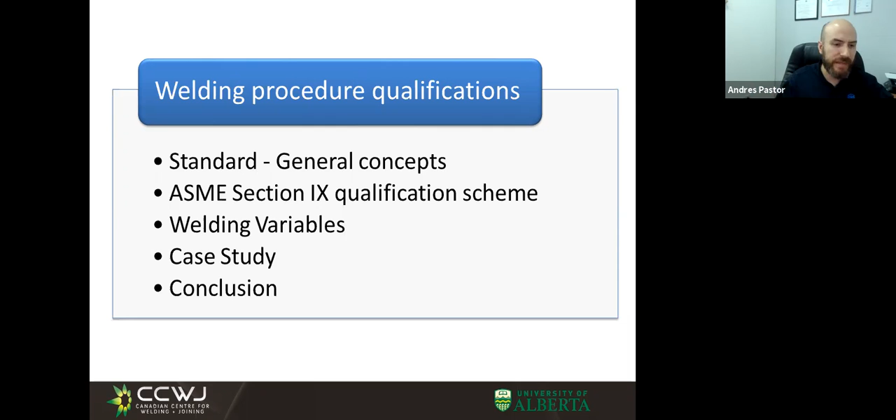So I think we can begin this class with the following question: what do we need to know about welding to manufacture a welded component? I would like to give you my personal experience as an answer to this question.

When I was younger, when I was 24 years old, I started to work at the National Commission of Atomic Energy in Argentina. During my academic training, I learned about arc physics, heat transfer, welding processes, and welding metallurgy, perhaps the same knowledge you will have at the end of this course.

However, my first work was material selection for internal components in nuclear reactors and the definition of welding procedure qualification requirements for these components. It was really interesting and challenging work for me.

However, I remember the words of my boss who told me, Andres, your objective in this group is to understand this book. And he gave me ASME section 3, subsection NG, which are the rules for construction of core support structures in nuclear reactors.

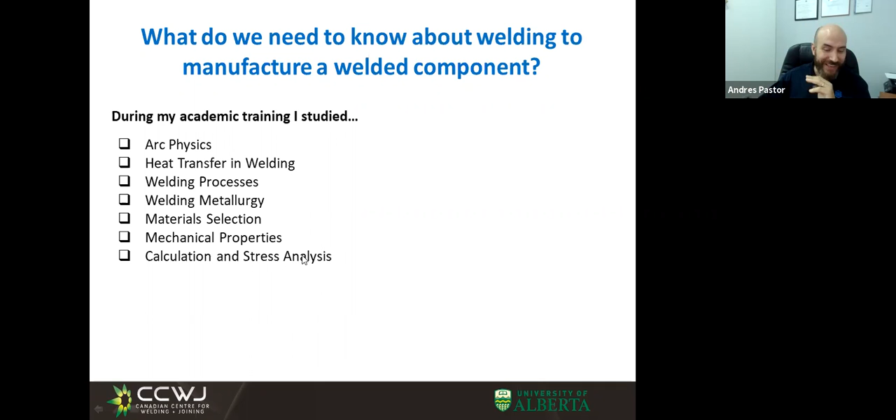And I was working for about 2 years without martensites, without peak temperatures, without cooling rates, without globular transfer—only working with codes and standards.

So what did I learn from this experience? I think the knowledge about welding is very important and fundamental, because it allows us to understand the variables that affect the mechanical properties, the chemical properties, the phase transformation, residual stresses, among other things.

This is the most beautiful part of welding. For example, in my case, I love studying about welding metallurgy.

However, nowadays it's not possible to consider an engineering project without using standards and codes, because they are based not only on investigation data but also on service experience. This is very important in our engineering projects: the service experience of materials, the service experience of design criteria, the service experience of welding processes.

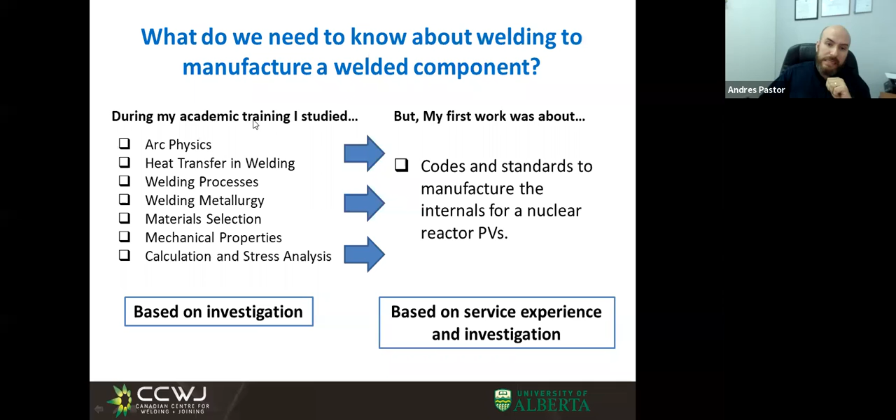I will continue. Before talking about welding standards, it is important to establish the main objectives of standards in general. Standards have 4 objectives: specify, simplify, unify, and balance.

Specify means define precisely some characteristic or set of characteristics—for example, the specification of the base metal for a welding process. Simplify means reduce the number of features to the necessary amount—for example, the dimensions of filler metals.

Unify, on the other hand, means establish a common criteria—for example, the tests required in welding procedure qualification. And balance refers to making a balance between the demands of the user and the capability of the manufacturers. These four objectives define the purpose of standards, all standards in the world.

I think standardization is an essential tool in this world, particularly today, where the materials, equipment, personnel, and operators generating data come from different parts of the world. Here in this slide, I want to show you a very interesting example of the need for standardization.

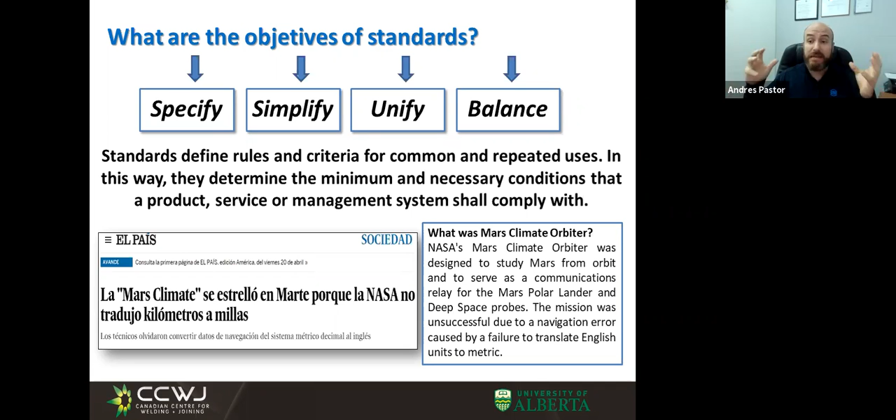This is a very simple example, but I think it's very important to know what is the objective of standardization. So you had a class about different standards, about the Canadian standard. It was excellent, a very interesting class. So you know that there exists a huge amount of standards around the world, and it is impossible in a class to be able to completely explain the scope of even one standard.

But I want to show you just some examples to get important concepts about welding standards. Today we will work with ASME code. Particularly, we're going to use the ASME BPV code, which means the boilers and pressure vessel code. In this class we will work with the ASME BPV code section 9, which includes the requirements for procedure and performance qualification in welding, brazing, and fusing. Using this standard, we want to answer different questions.

Firstly, what is a welding procedure specification, or WPS? Secondly, how is a welding procedure specification developed? And finally, how is a welding procedure specification qualified?

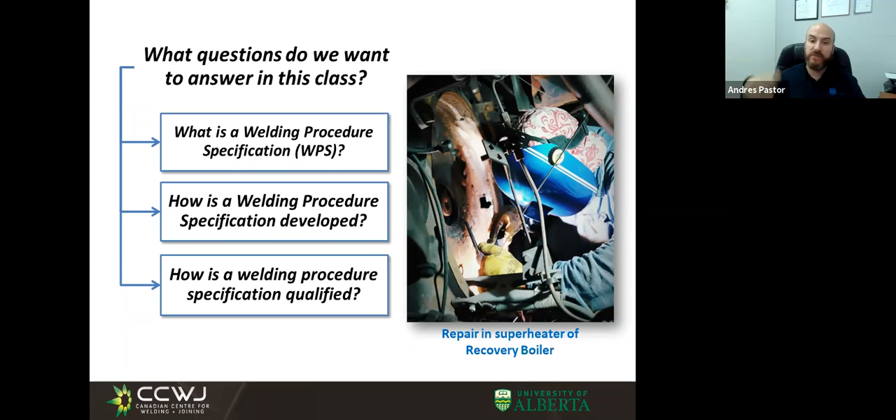So the first question is, what is a welding procedure specification, or WPS? To have a precise definition, we have to go to ASME section 9, in paragraph QW 200.1. This paragraph says a WPS is a qualified welding procedure prepared to provide direction for making production welds according to the code requirements. The WPS provides direction to the welders or welding operators to assure compliance with the code requirements. This is the definition of ASME section 9.

And this definition has three important concepts. Firstly, a WPS provides direction for making production welds. This indicates that the WPS shall be a tool for the execution of welding works.

It is very common, at least in Argentina - I don't know if it's the same case in Canada - but in Argentina, it's very common to see that the WPS are kept in a quality control office of the companies. I think this WPS is useless. I don't trust these companies. The WPS needs to be in the welder's hands. This is the appropriate place for a WPS, a welding procedure specification.

And in this definition, second, we can read that the WPS assures compliance with the code requirements. This is very important because the objective of qualifying a welding procedure is to assure compliance with the minimum requirements defined by the code, typically the soundness and the mechanical requirements.

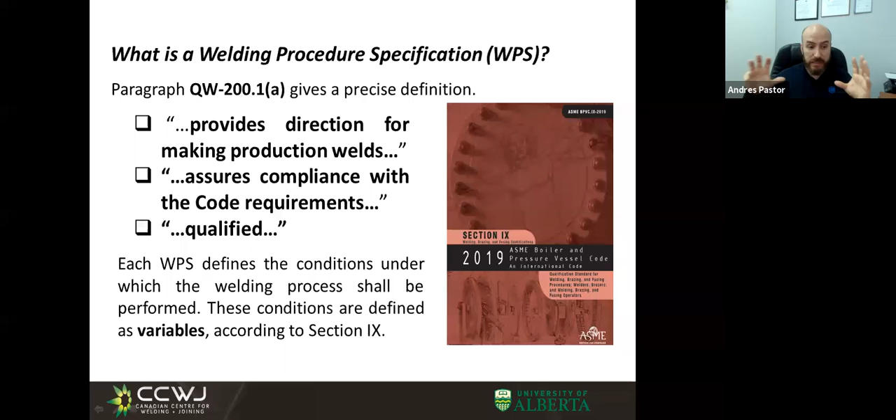Okay, the next question is, what is a procedure qualification record, or PQR? The paragraph QW 200.2 gives a definition of PQR. In this paragraph, we can see that the PQR is a document where the variables during the welding of the test coupon are recorded. Moreover, the PQR also contains the test results of the specimens extracted from the test coupon.

This is the information that shall be included in the PQR: the variables during the welding of test coupons and the test results. Here we have to take into account the following: recorded variables in PQR normally fall within a small range or a unique value.

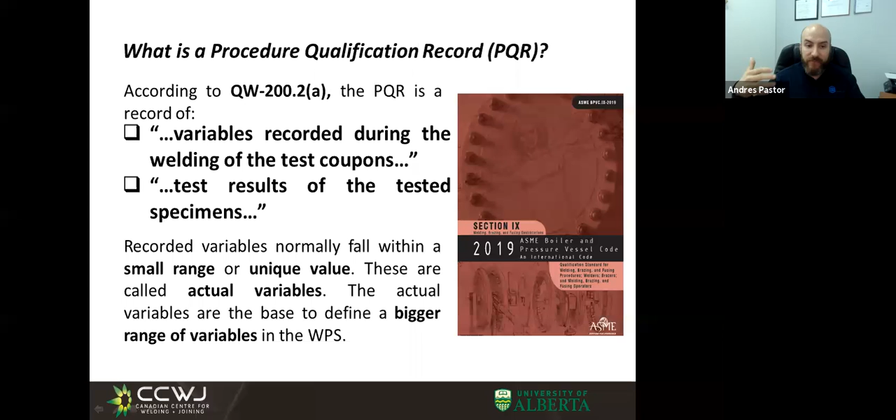For example, the base metal thickness is a unique value, while the heat input has a small range due to normal variation of welding parameters such as current, voltage, or welding speed. The variables used to weld the test coupon are called actual variables. I'll give you an example about this concept.

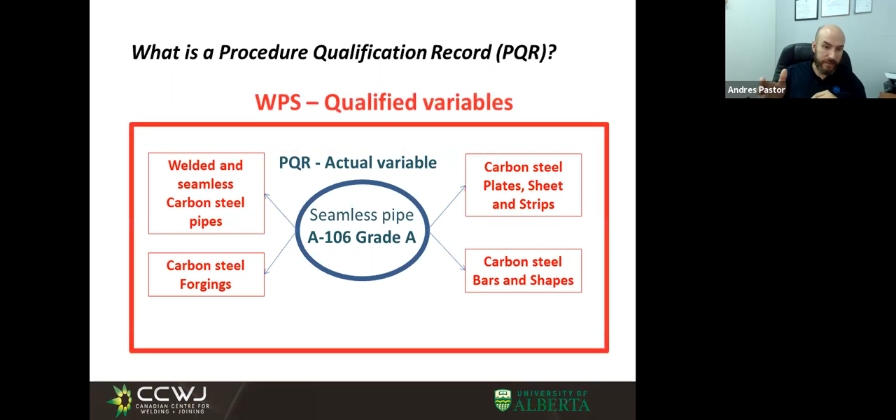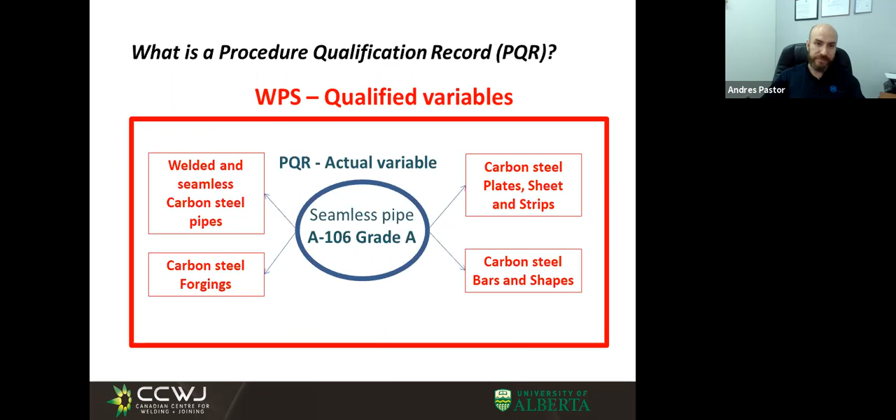This actual variable regarding the base metal qualifies a big amount of other materials, for example welded and seamless carbon steel pipe, carbon steel forging, carbon steel plates, sheet and strip, carbon steel bars and shapes, among other materials. These materials are qualified variables and shall be included in the WPS. This is a very important concept: each actual variable qualifies a more extensive range of variables, called the qualified variables, which are included in the WPS.

So here we have a flow chart showing the different steps to qualify a welding procedure. It's important to prepare a preliminary WPS, which isn't a qualified WPS. It has the only purpose of being a guide during the welding of the test coupon. With this preliminary WPS, we weld the test coupon.

During this step, we record the actual variables of the welding - this is the second step. At this point, it's important to know that ASME Section 9 defines the variables that shall be recorded.

When the test coupon is finished, we follow with the tests for the welding procedure qualification. In case of rejected tests, the qualification is disapproved, so it is necessary to make a new welding test coupon.

In case of approved tests, you can pass to the third step, the PQR. In this step, you include the actual variables recorded during the welding of the test coupon and the results of the approved coupon tests.

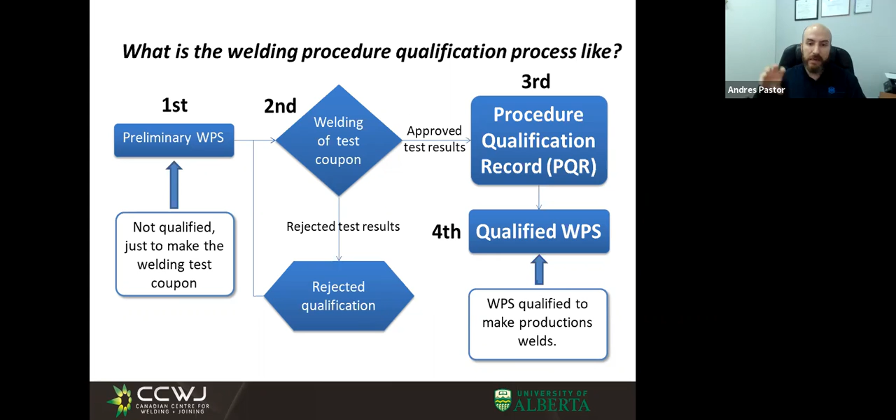The last step is the writing of the qualified WPS, and this WPS shall be developed with the qualified range of variables defined by Section 9 according to the recorded actual values. This is the process to qualify a welding procedure.

We previously talked about the variables - the parameters and characteristics of the welding process are defined as variables. In this slide we have the four types of variables defined by ASME Section 9. We have the essential variables, which are the variables that strongly affect the mechanical resistance and ductility.

We have the non-essential variables - those that don't affect the mechanical resistance or ductility. The supplementary essential variables strongly affect the toughness of the welded joint. Finally, the special process variables are those that affect the mechanical or chemical properties in special processes.

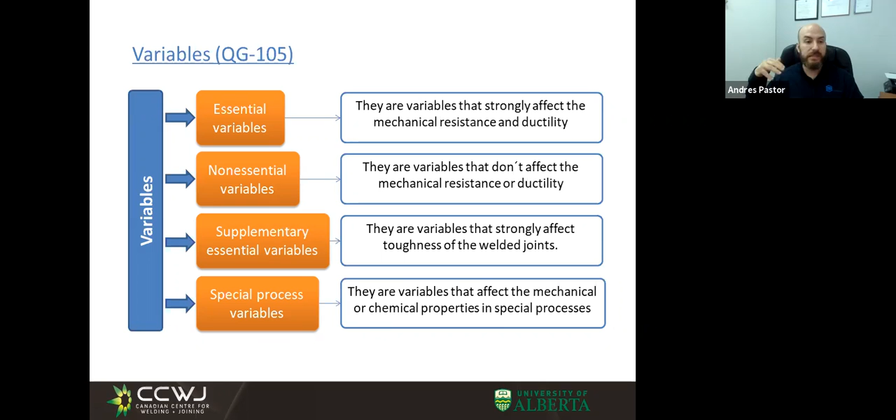One of the objectives of this presentation is to understand which variables shall be included in all WPS.

Paragraph QW 200.1 is fundamental because it defines the variables that shall be included in all WPS. This paragraph says three important things. Here you have paragraph QW 200.1 in the presentation. Firstly, all WPS shall contain essential and non-essential variables - this is a mandatory requirement.

In second place, the supplementary essential variables are included only when required. When ASME Section 9 says 'when required,' it is referring to the construction code. The supplementary essential variables are activated when it's necessary to demonstrate the toughness of the welds. Obviously it's not always necessary, because it depends on the service condition, the type of material, the geometric condition such as thickness, among other factors. So the construction code defines when toughness tests are required in the welding procedure qualification.

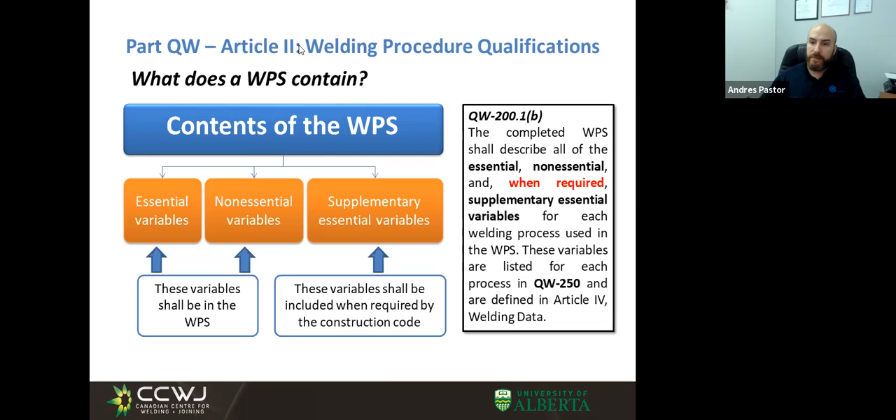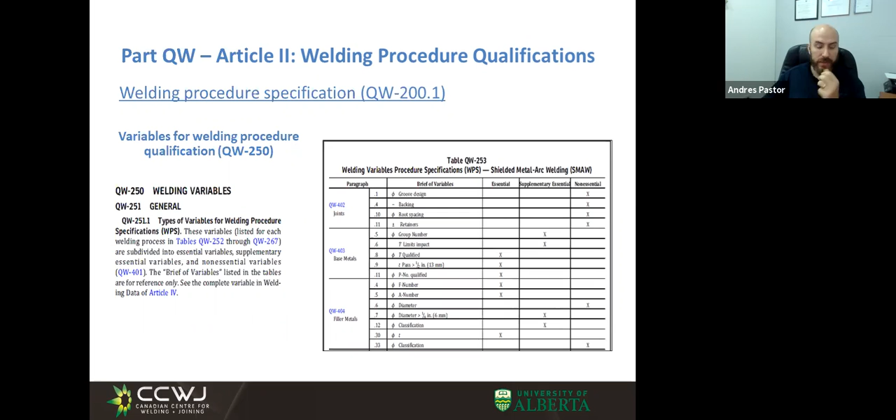A good starting point to use Section 9 are tables QW 250, because these tables define the different variables for each welding process. Here we have an example of one of these tables. In this slide, you can see table QW 253 applied to the stick process, or shielded metal arc welding. In this class, we will work only with this table, but remember there is a table QW 250 for each welding process.

This table is divided into different groups of variables. We have here the joint variables, QW 402. We have the base metal variables, and the filler metal variables. You have to remember that this table is bigger than this; this is just a little part of it.

Each group of variables includes specific variables and defines if this is an essential, non-essential, or supplementary essential variable. Here you can see that this X indicates what kind of variable it is. For example, capital T qualified, in this case, is an essential variable.

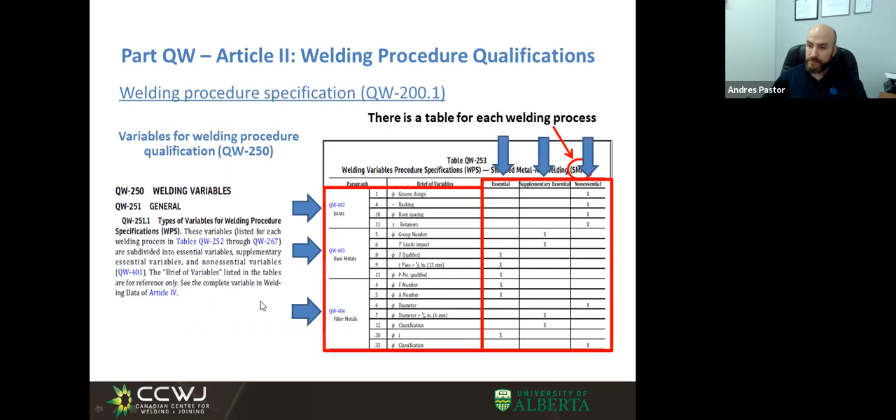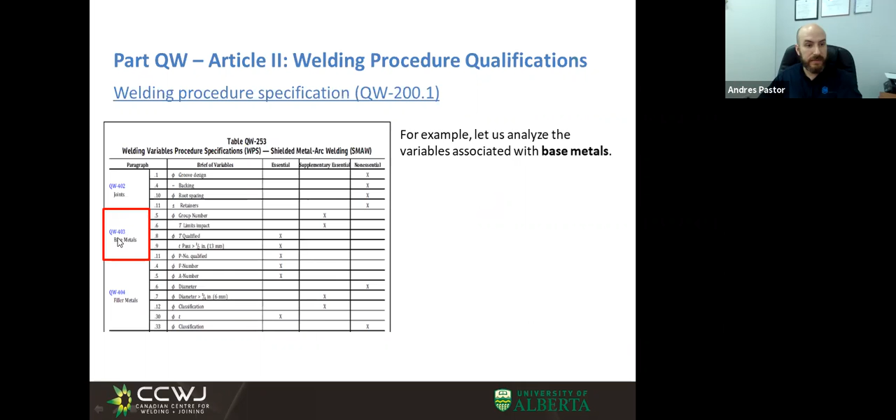In this slide we have an example to use this table. I think the best way to learn how to use this table is, for example, to analyze the variables associated with the base metal. Here you can see that this variable has 3 essential variables and 2 supplementary essential variables.

In ASME Section 9, capital T is the thickness of the base metal. You can see capital T in this row, and this row is the thickness of the base metal. For example, during the welding procedure qualification, I had to define the base metal thickness qualified according to the test coupon thickness. For this definition, this table has a variable called capital T qualified.

The question now is, how can I define the qualified range for base metal thickness? Go to the table: QW 403 is the paragraph applied to base metals. Paragraph 0.8, for example, for the variable T qualified, is applied to this specific variable. So the description of the qualified range of this variable is in paragraph QW 403.8. In this paragraph we have the description of this variable.

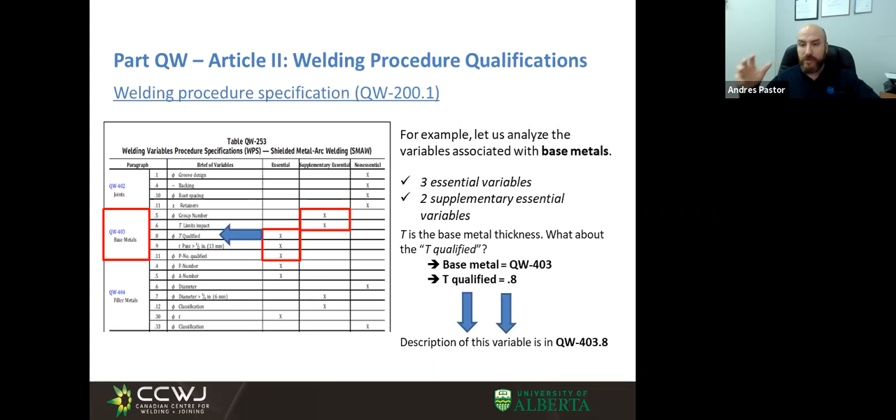I would like to say that this is a good starting point to study ASME Section 9. This methodology to analyze the variable is the same for all variables. In this sense, ASME Section 9 is a mechanical code. If you understand the process with one variable, you can advance with the other variables using the same analysis. This is a good advantage of this code.

Now we are going to talk about some specific variables defined in ASME Section 9. One of the most important concepts generated by this section is the definition of P numbers. The P number is a grouping of base metals based on chemical composition, weldability, and mechanical properties.

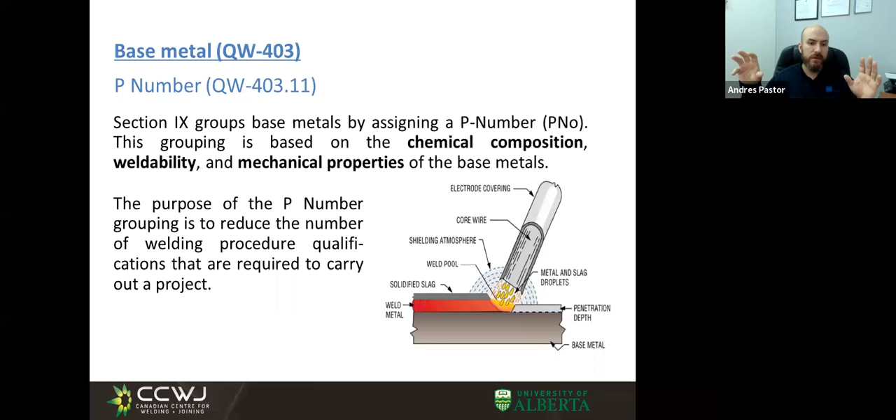The purpose of P number grouping is to reduce the number of welding procedure qualifications required to carry out a project. In general, if I qualify a welding procedure with a specific material in a P number group, this welding procedure is qualified to weld all materials in this P number. I'll repeat this concept because it's very important: if I qualify a welding procedure with a specific material in a P number group, this welding procedure is qualified to weld all materials in that P number. There are exceptions to this rule, but this is the general concept about the P number.

Here we have a table with the different P numbers and the typical chemical composition for each one. P number 1 is the most common material, including carbon, carbon-manganese, and carbon-manganese-silicon steels. Then we have different low alloy steels, typically chromium-molybdenum steels. After P number 5, we have other families of materials such as different types of stainless steel: ferritic, martensitic, austenitic stainless steel, etc.

Non-ferrous based materials, for example aluminum, copper, nickel, etc. Here you can see in the last numbers, for example, that P numbers 41 to 49 are the nickel and nickel-based alloys.

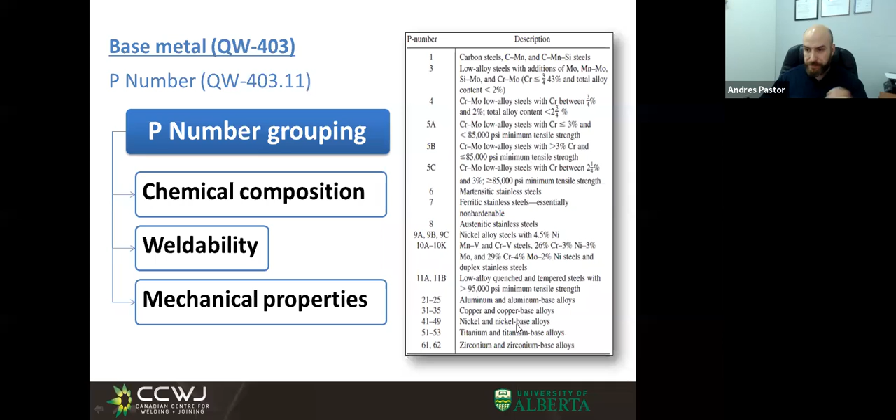Let's start working with this variable, let's start working together. Here we have a little part of the table QW 422, which is included in Section 9.

This table is very important because here we find the assignment of P number to different specifications, types, grades, and materials. In this table, the first column defines the material specification of the base metals.

In the second column, we have the designation, type, or grade of our materials. And in the fifth column, we have the assignment to the P number. We want to study this table with some examples.

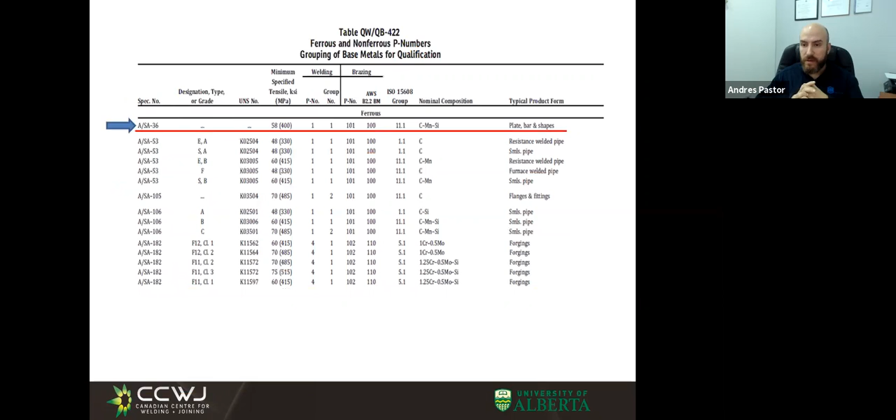It is very easy to use. In the first row, we have the material specification A36. This is a typical base material for structural use. Here you can see the nominal composition, typically plates, bars, and shapes, and it is a P number 1.

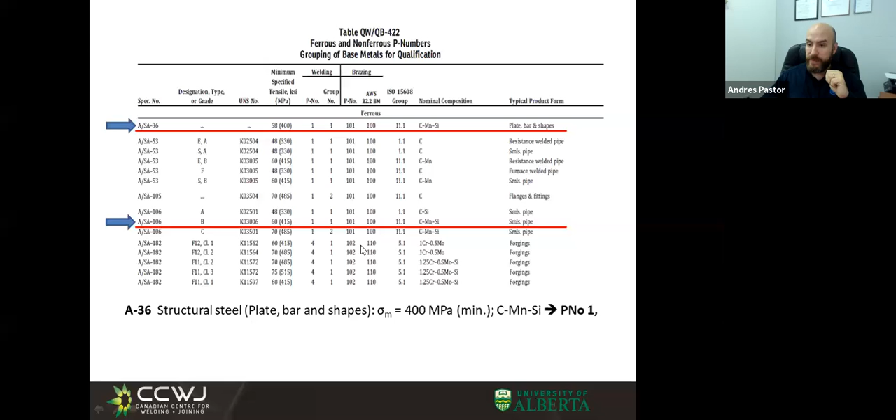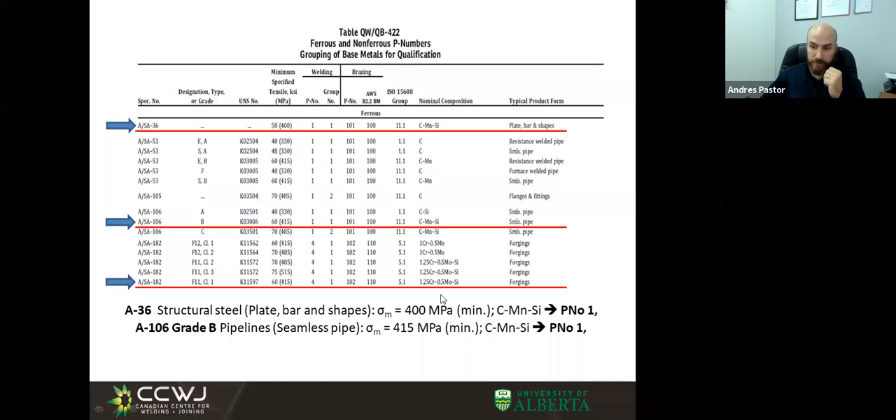Finally, we have another material, in this case forging. According to this material specification with this grade, however, the P number is P number 4 because the chemical composition is different. In this case, it's steel and chromium molybdenum and silicon steel. So this table is very easy to use.

Let's continue and analyze the P number variable. The table QW253 is the starting point to define the qualified range, and we can see that we have a variable called P number qualified.

Remember that this variable is applied to the stick process; you have other tables for other processes. And it is an essential variable, which means that if I modify this variable beyond the qualified range, I have to make a new qualification, a new procedure qualification.

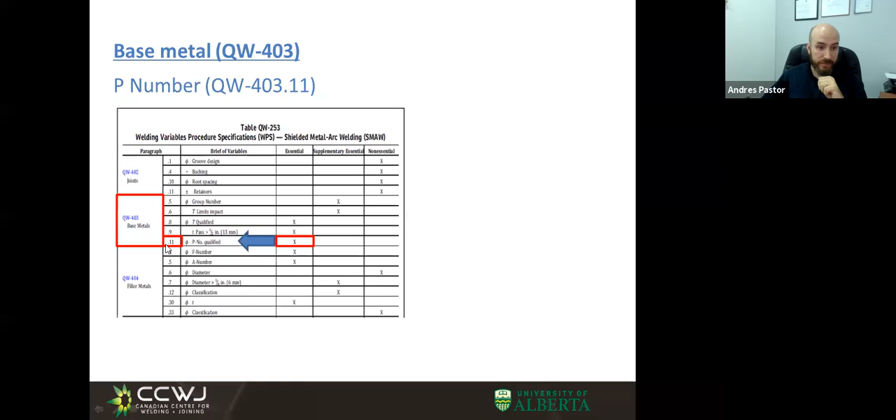This is the paragraph, in this case QW 403.11. This paragraph says that the material included in the WPS shall be qualified by a test coupon that was made using the base metal defined in QW 424.

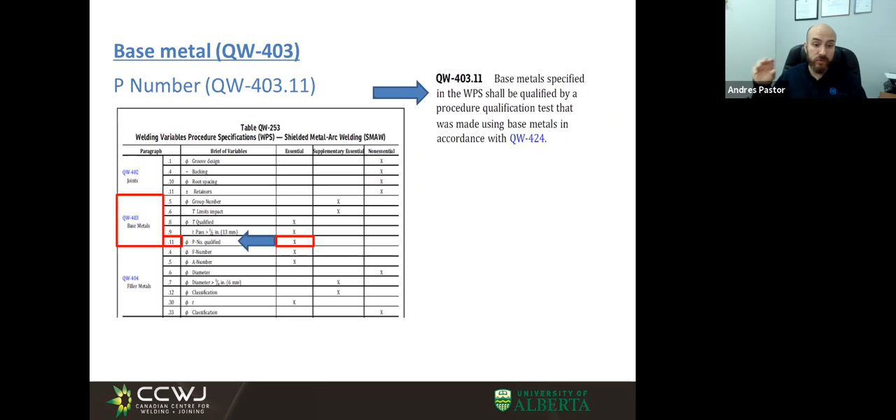Here we have a new reference, so we go to analyze this paragraph. The paragraph QW 424 includes a table that defines the qualified material range based on the material used in the welding procedure qualification.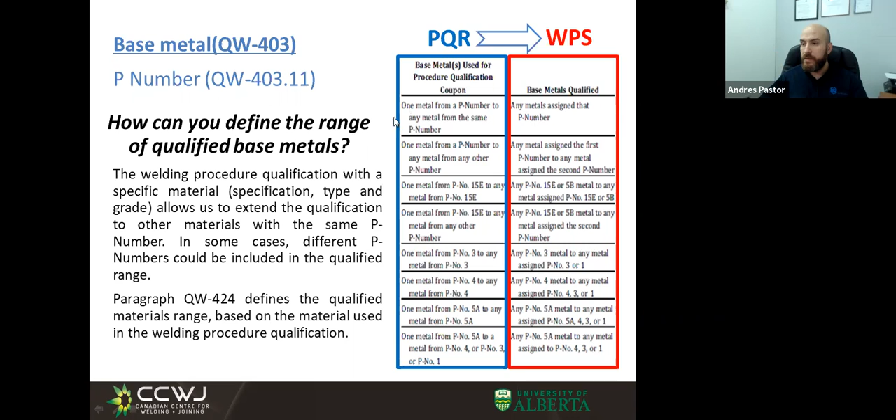The first and second rows in the first column define the general condition of material in the test scope. The first row is the case where welding is done between materials in the same P number, for example one metal from a P number to any metal from the same P number. Here we have one of the most typical cases in welding procedure qualification.

The second row is applied to welding between two materials included in different P numbers. From the third row onward, there are specific cases applied to particular P numbers. For example, in this row, you can see that this condition is applied specifically to P number 4.

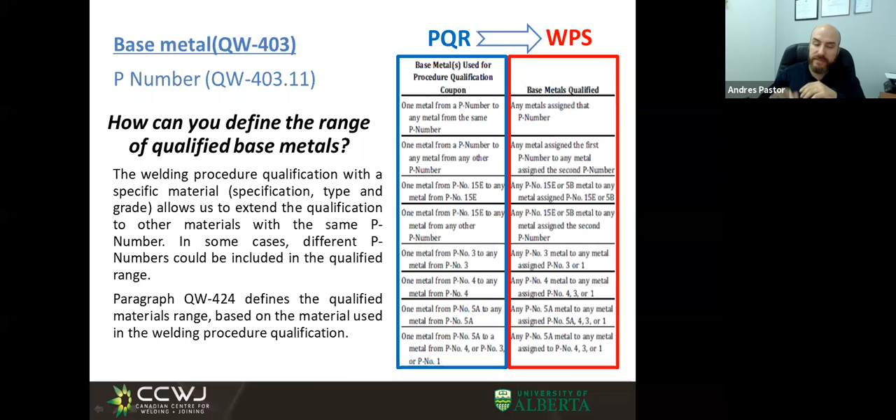I will give you an example to use this table. This is a quick example: we will consider a test coupon of austenitic stainless steel, for example a plate of this material specification. The first step is to define what is the P number applied to these materials.

To achieve that, I have to go to table QW 422, and here we have this material specification. This is a P number 8. This material is a P number 8.

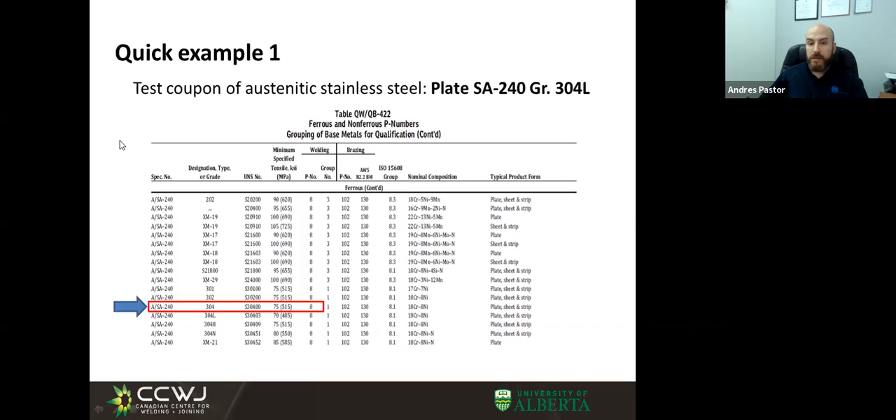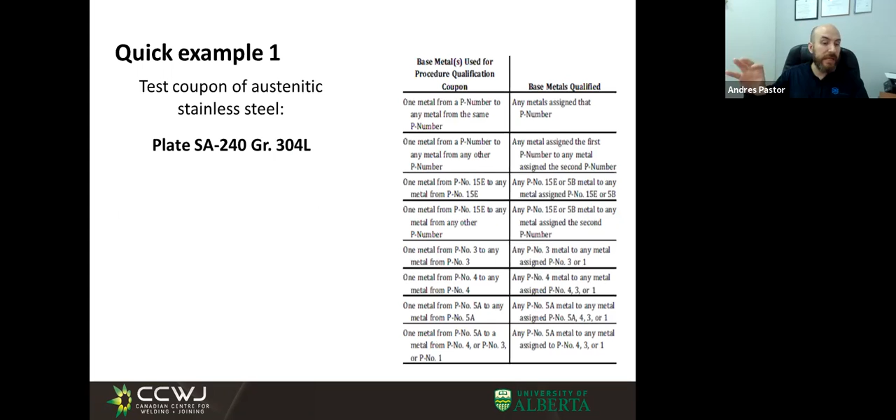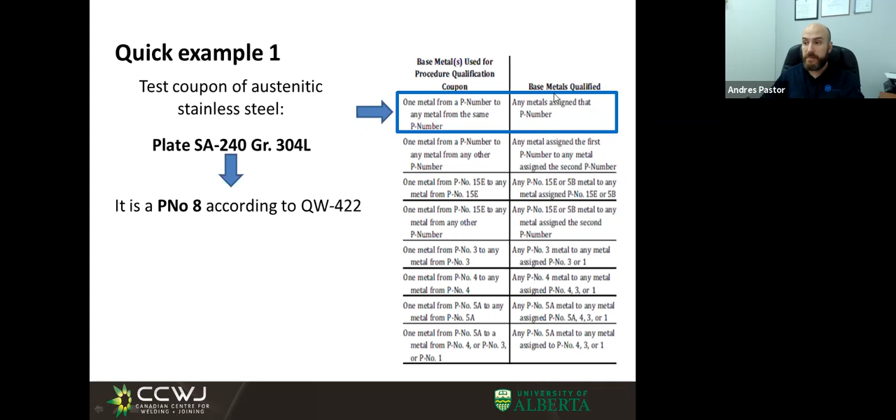So now I defined the P number. If you analyze this complete table, you will see that it hasn't a specific row applied to P number 8, so we have to use the first row. This is P number 8 according to table QW 422, and the first row defines the qualified range of base metal: any metal assigned that P number. This means that all P number 8 base metals are qualified.

Now go to a second quick example. In this case, the test coupon is a low alloy steel, for example a seamless pipe according to this material specification, so I have to define the P number.

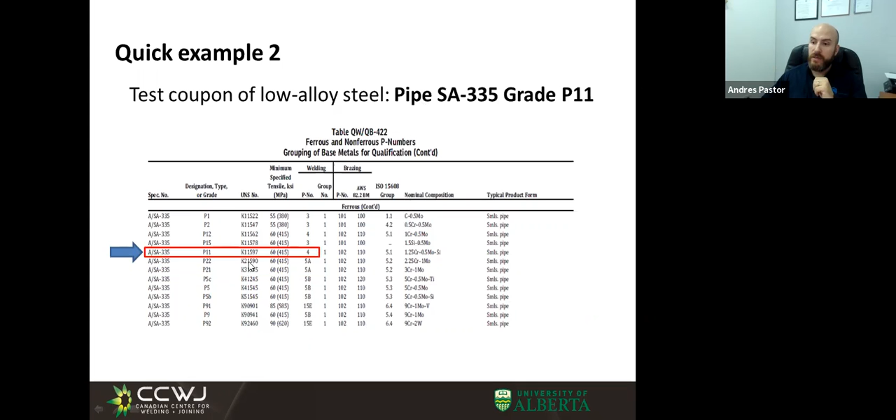This is a P number 4 according to table QW 422. And if you go to table QW 424, we can see that we have a specific row for this P number. The welding of P number 4 not only qualifies P number 4 to P number 4, but also the combination of P number 4 to P number 3, and P number 4 to P number 1. This is the qualified range of base metal: all P number 4 are qualified, plus the combinations P number 4 to P number 3 and P number 4 to P number 1.

You have to remember that the first column is the actual variables, for example the material specification of the test coupon, and the second column is the qualified range that shall be included in the WPS.

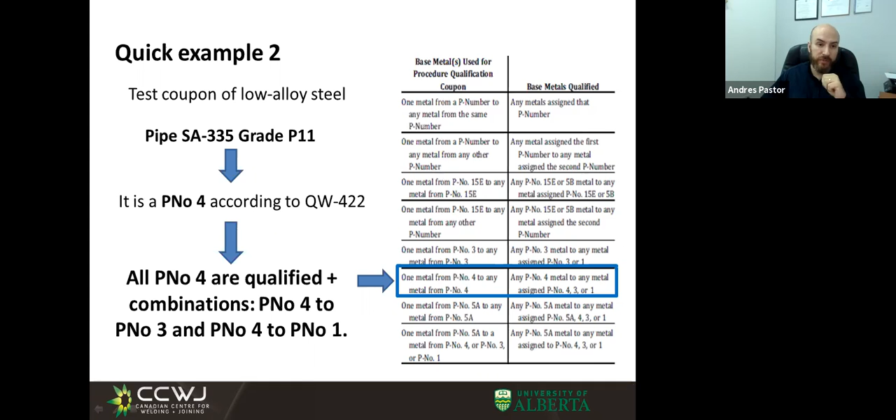So this is a brief summary of the necessary steps to define a qualified base metal range. In the first step, we define the material specification. In the second step, we go to table QW 422 to define the P number. Then we go to table QW 424 to define the range of qualified base metals. This is very important: one material specification defines a bigger range of base metals.

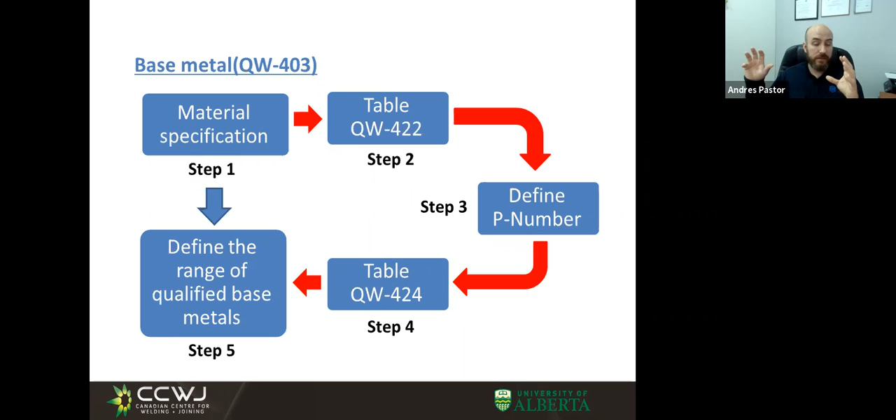I changed the camera to go to the blackboard. Just a second. I don't know if you can see the blackboard, okay. Yeah, it's visible. Yes? Okay, perfect.

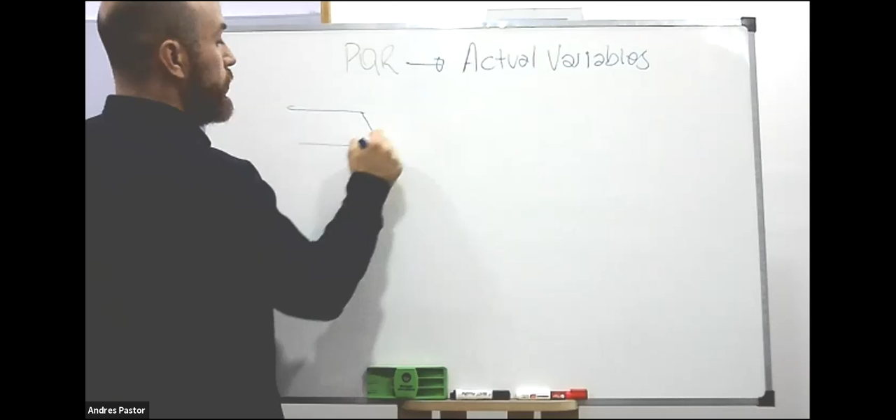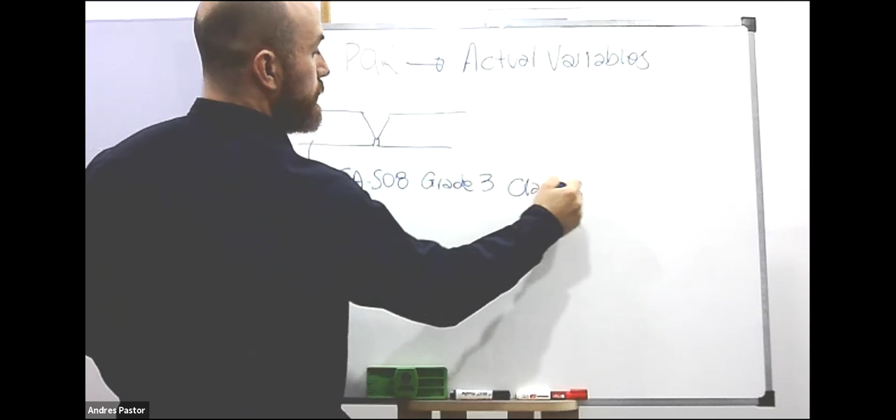So in this problem we have to complete the PQR. Remember the PQR contains the actual variables. In this case I have a test coupon with these materials defined in this problem, and on the other side we have this other material. This is my test coupon, so I have to define the difference and complete the yellow boxes in this PQR.

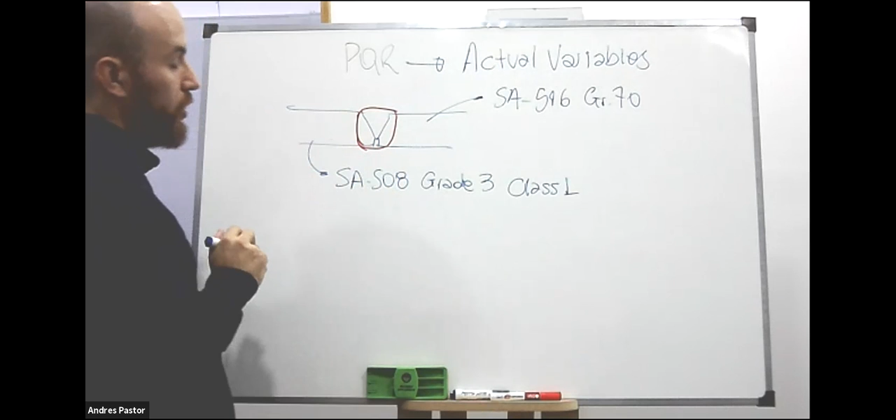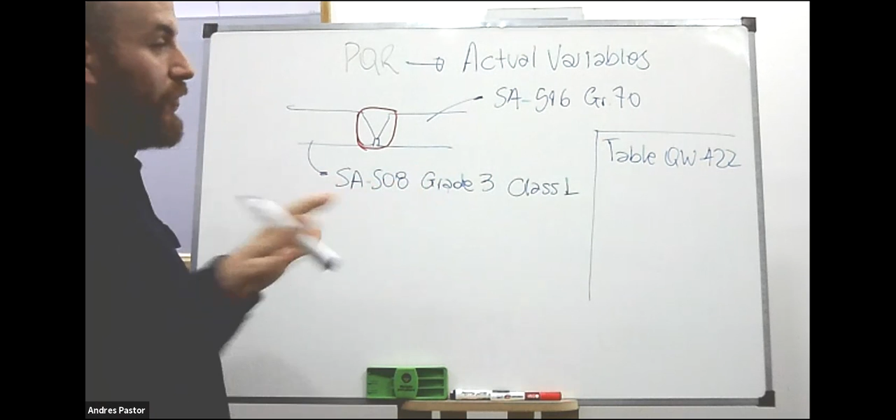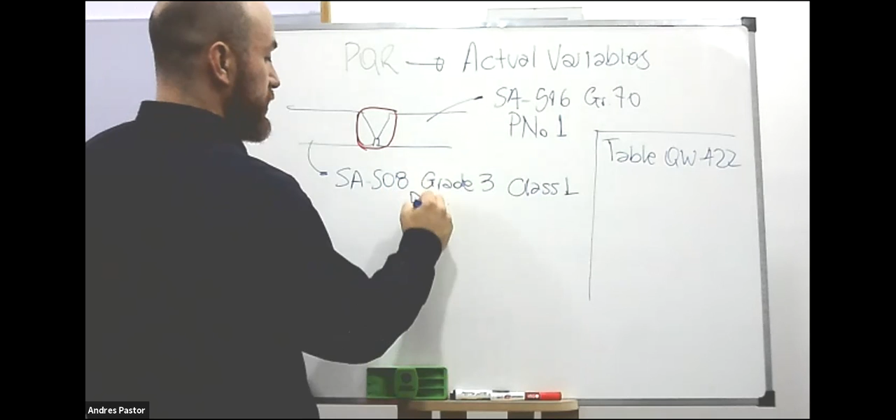So I have to define, in the first place, the P number of these materials. To define this P number I have to go to the table, remember the first step is to go to table QW 422. I don't know if you have this table, but I will give you the result: this is a P number 1, and this is a P number 3.

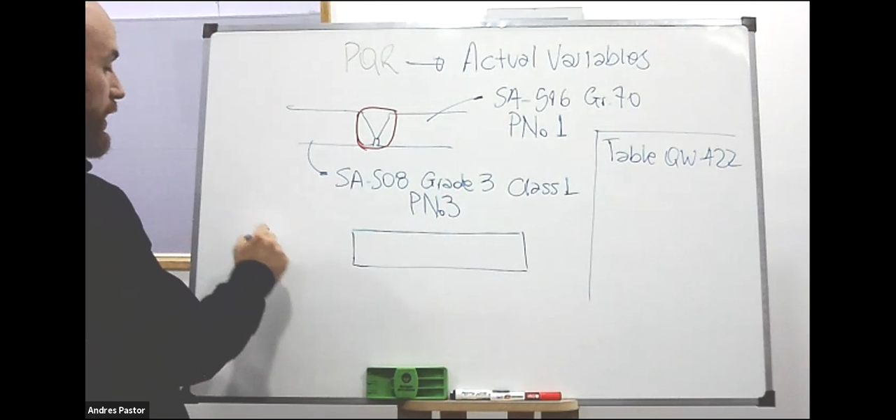So I have to complete the PQR. In the first boxes, I have to include the specification. In this case, the specifications are these, so I have to include this specification in the yellow boxes.

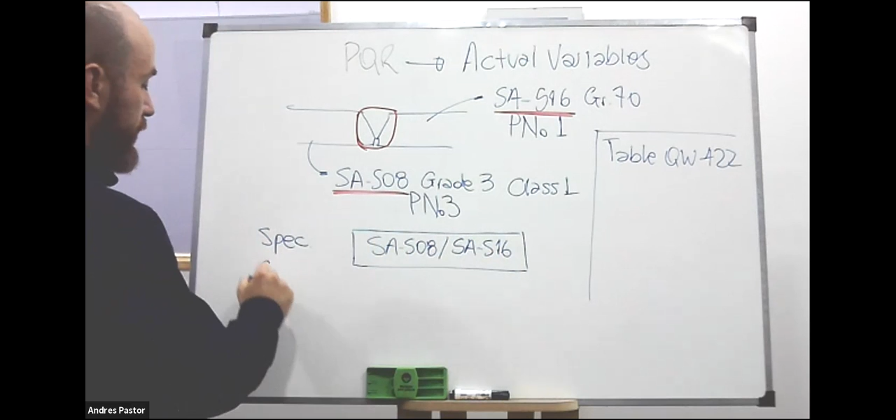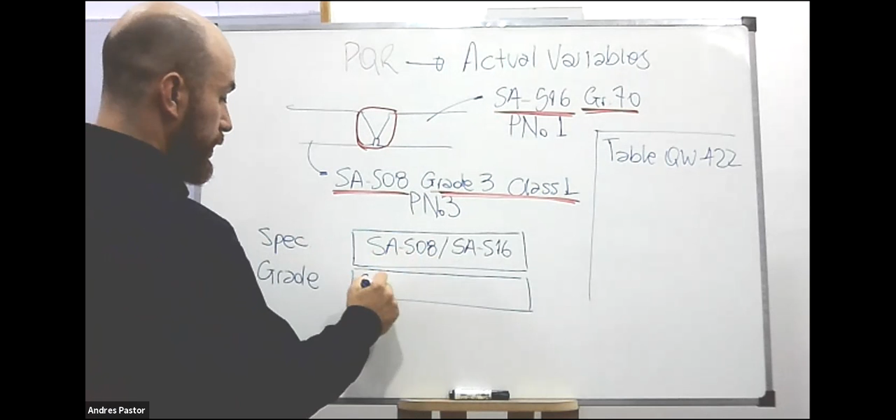Then I have to complete the grade of materials in the second boxes. In this case, the grade materials are grade 70, and this is the grade of the other material, so I have to complete grade 3 class 1 and grade 70. And the last step is to complete the P numbers.

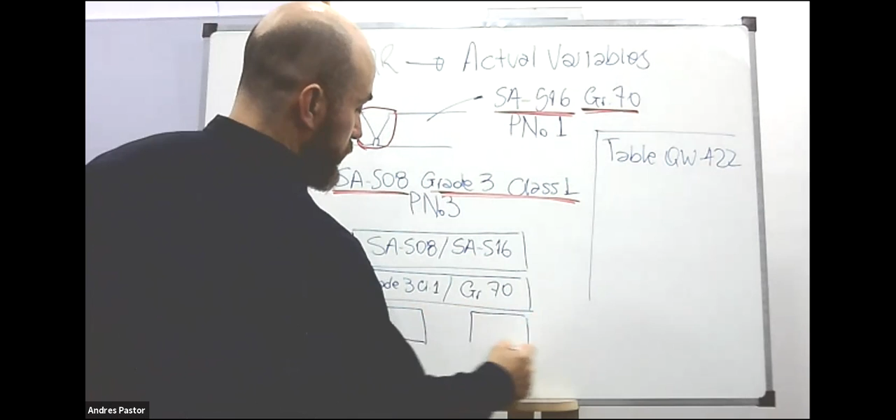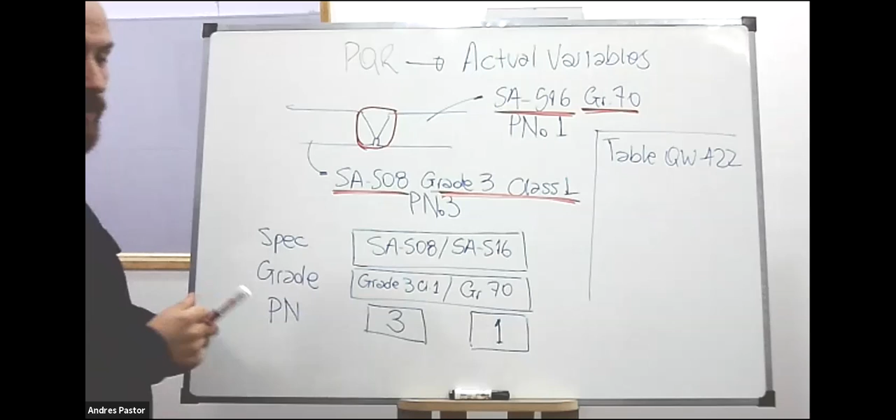In this case, I have to include the P number obtained from table QW 422: this is P number 3 to P number 1. So this is a very easy example, but it's important because this is the first step when we make a welding procedure qualification: defining the actual variables in the PQR, because these variables define the qualified range.

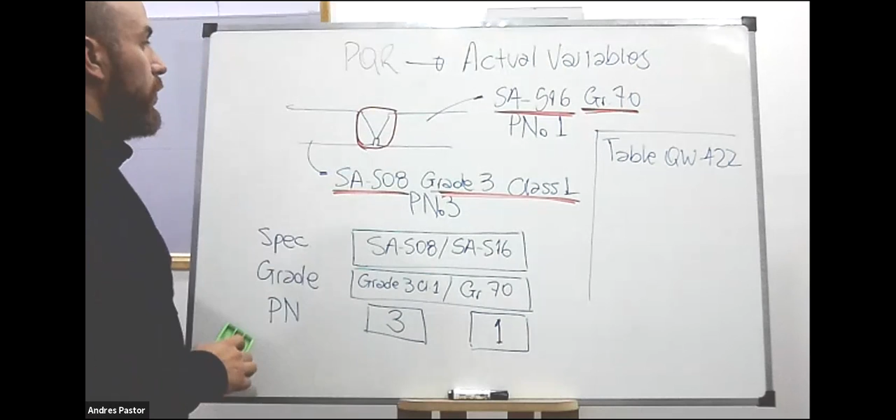Well, I think that we have... so sorry. Okay, so here we have the result. This is the last exercise of this section.

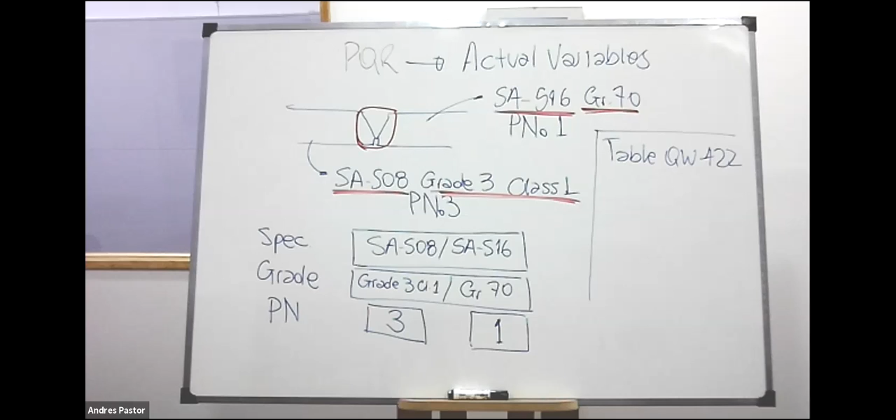Can you see the screen? No, so sorry.

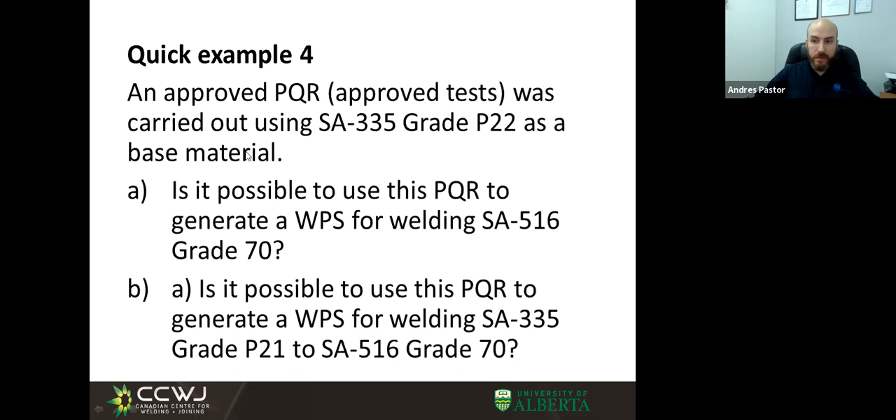Okay. Now we're going to talk about the base metal thickness and how to define the qualified range of these variables.

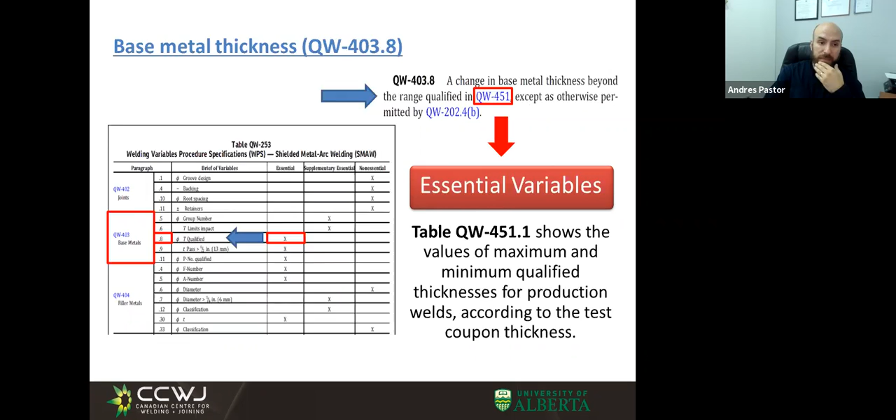If you go to this paragraph, it refers to paragraph QW 451. This paragraph is very important because it includes different tables where we can define the qualified base metal thickness. So here we have table QW 451.1 - sorry, I have a problem with the numbers in English. In this table, we have a lot of information about qualified base metal thickness, qualified deposited weld metal thickness, and necessary tests for welding procedure qualification. However, we will focus on the qualified thickness of the base metal.

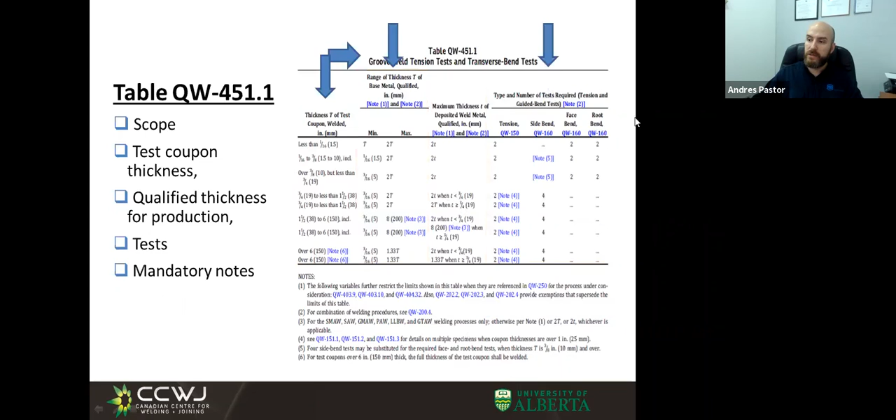So in the first column, you have the thickness of the test coupon, okay? This is our actual variable in the welding procedure qualification. In the second column, we have the range of qualified capital T of the base metal. So in the last column, we have the type and number of tests required, for example the tension test, the bend test, the different tests necessary to the welding procedure qualification.

So we will work only with the base metal thickness, okay? This table is very easy to use. In the first column, we have the thickness of the test coupon, and the second column is dividing the minimum and maximum qualified thickness according to the test coupon thickness. So the qualified range is defined by the minimum and the maximum qualified thickness. It's very easy to use this table.

So here we have an example. Let's suppose that we have a test coupon of 15 millimeters in thickness, okay? So this thickness is in this row. Remember that the first column is the test coupon thickness. So the minimum qualified thickness is 5 millimeters.

You can see it. Excuse me, I'm going to take a pencil here. 5 millimeters, and the maximum qualified thickness is 2 times capital T. In this case, capital T is 15 millimeters. So the qualified range in this case is from 5 millimeters to 30 millimeters. Very easy.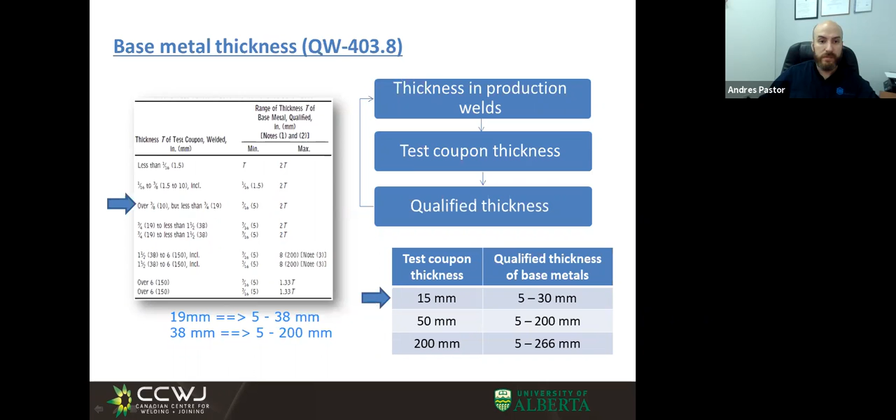So according to this problem, only the second PQR can be used for this range of thickness. I know that I am going too quickly because we have short time, but if you have any question, you can write me in the chat.

Okay, perfect. So give me just a second. I don't know if it... I will write the qualified range in this slide. Sorry, just a second, I have a problem with the pencil.

Here we are. The first PQR, according to the table QW 451.1, has a qualified range from 5 millimeters to 38 millimeters. And the second PQR has this qualified range, from 5 millimeters to 200 millimeters. So the question is, what?

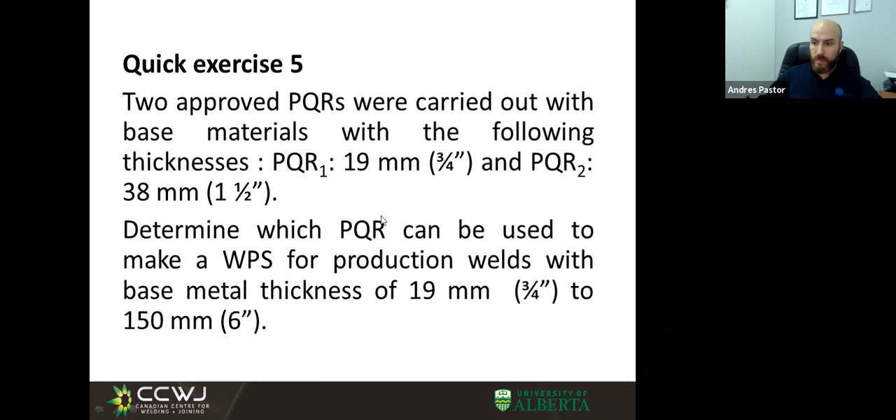And this is the last variable that we want to analyze in this class, and this variable is applied to the filler metal. Particularly, we want to describe the variable called F number. The F number is a grouping of filler metal very similar to P numbers because it has the same objective, to reduce the number of procedure qualifications. Before the F number grouping appeared, each combination of filler metal required a separate welding qualification, the same as with the base metal, and this requirement generated a huge number of welding procedure qualifications. In this sense, the F number is very similar to P number grouping.

However, the main difference is the grouping criteria. In the case of filler metals, the groups are based on the operating characteristics of the filler metal. It doesn't mean that the chemical composition is not important. Actually, there is another variable applied to the filler metal which considers the chemical composition, called A number. But this is another story, another variable.

What are the operative characteristics of the filler metals? Well, this is a good question. In the case of a stick electrode, the operative characteristics are defined by the type of covering, for example. It's different the operative characteristic if you have a high cellulose covering, high titanium or rutile covering, or low hydrogen covering. They are different operative characteristics.

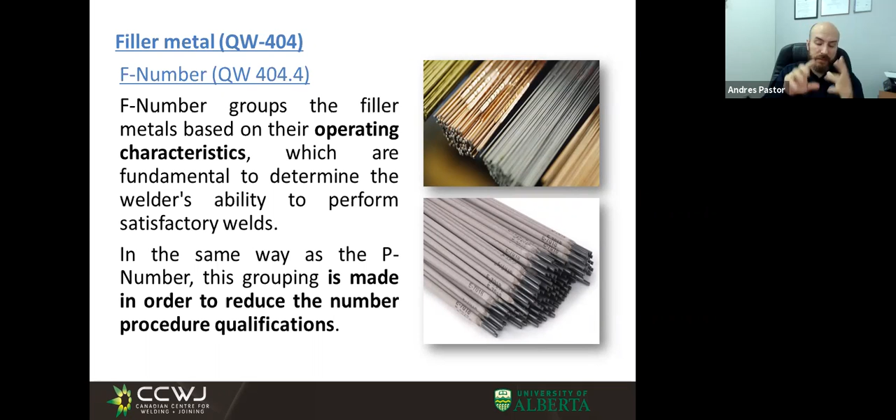The operative characteristic is related, for example, to the welding position, to the type of current, etc. This is the criteria of this grouping. The operative characteristic is very different from the P number, which the grouping criteria is the weldability, the chemical composition, and mechanical property. This is very different.

Let's start from the table QW 253. If we go to this table, we can see that the F number is referenced, and it is an essential variable in the welding procedure qualification. So it is a variable that affects the mechanical properties according to this definition.

Here we have the F number. The reference paragraph that is applied is QW 404.4. Here we have this paragraph, and we can see, if you go to this paragraph, you will see two important things in it.

Firstly, the table QW 432 defines the F number of the different filler metals. This is a new table, very important. Secondly, this paragraph established that a change from one F number to another F number is considered a change in essential variable.

This means that changing the F number used in the test coupon requires a new welding qualification or a new PQR. This concept is important because it defines the qualified range of these variables.

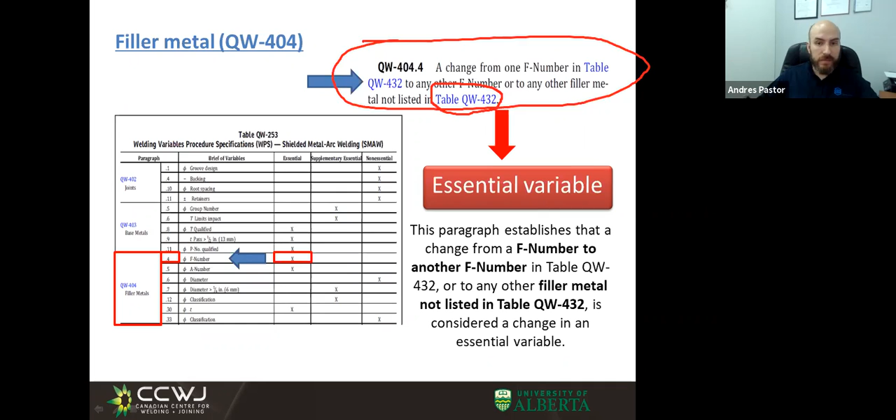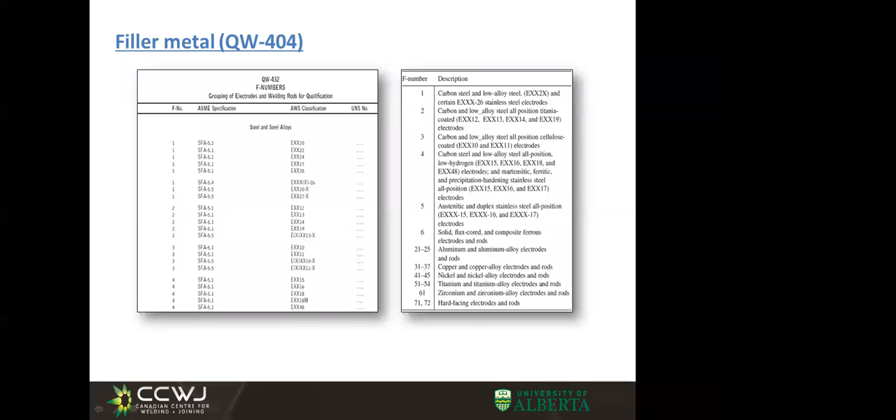Here we have the table QW 432, and this table is divided into 3 columns. The first one shows us the F number assignment. The second one defines the ASME specification, which is the specification of the filler metal, very similar to the specification of the base metals. Here I have an image.

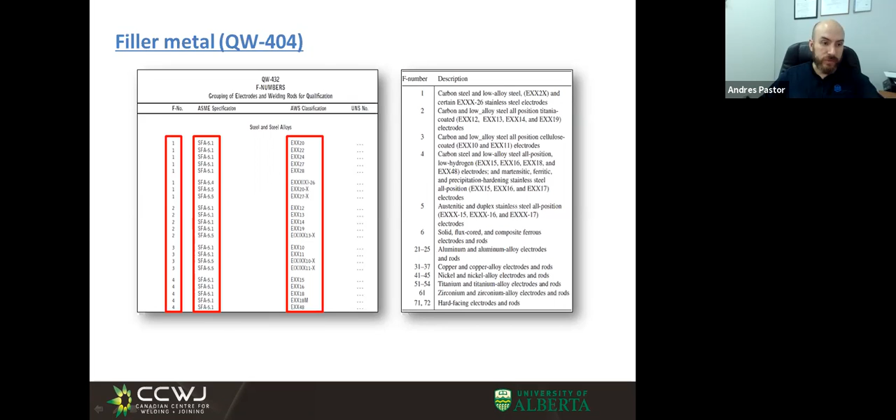Finally, the third column has the AWS classification into the filler metal specification. How is this table used? We will work with a specific example.

For example, the SFA 5.1 E7018 electrode. Here we have the definition of this electrode.

When we use this table, we have to begin with the second column, that's the column we have to use. In this column, we have to find the ASME specification of our filler metal. When we have identified the specification, we shall find the AWS classification, and then we have to define the F number. As easy as that.

So here we have our material specification, in this case for the filler metal. And then I have to search and find the AWS classification. So here we have something that is very important. In this case, the F number for this electrode is F number 4.

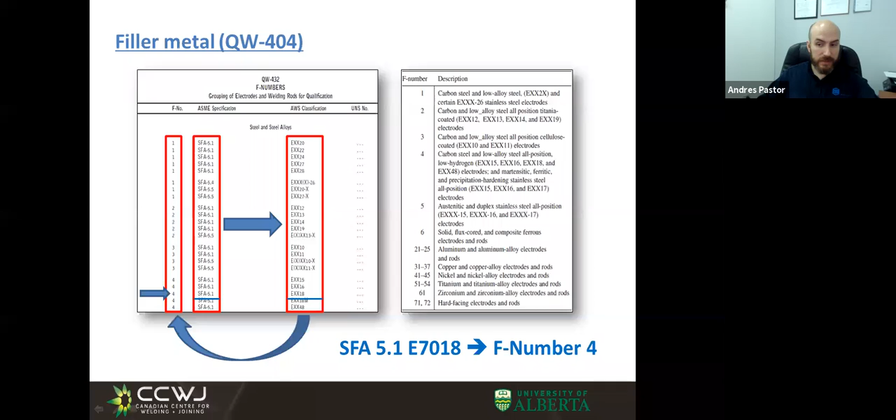So I come back to the presentation. This is the last presentation, a very simple case study to work together.

So I will go into the blackboard, I think that's easier and faster. Excuse me. Our PQR has these actual variables.

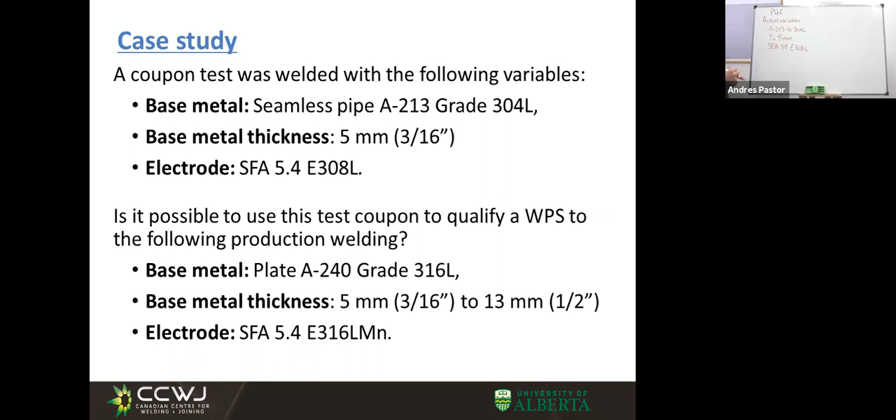Okay, so I have to define the qualified range. In this case, I have to go to table QW 422, and then I have to go to table QW 424. Here I define the P numbers of this material, and here I define the qualified range. The P number of this material is P number 8, and the qualified range is all P number 8.

So then I have to define the qualified range of base metal thickness. I have to go to QW 451.1, and according to this thickness, define the minimum and maximum qualified. In this case, the range of thickness is from 1.5 millimeters to 10 millimeters.

And finally, I have to define the F number. I have to go to table QW 432 and define the F number. In this case, the F number is F number 5.

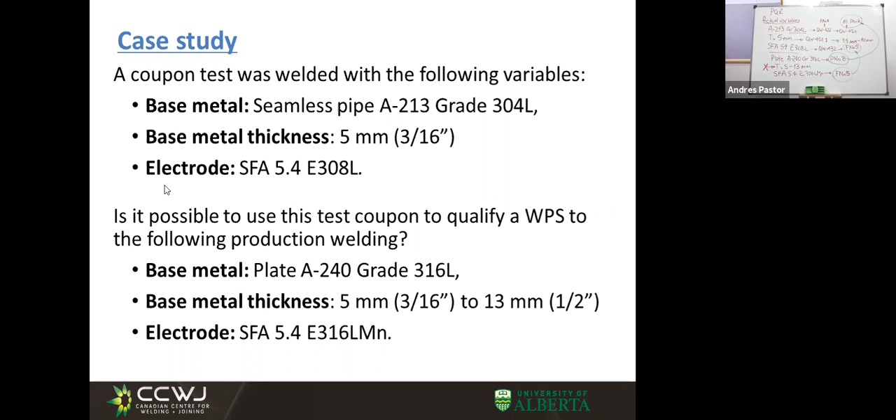Okay, do you have any question? I know it was very, very fast, so sorry, but it's a lot of information in this time. But do you have my email?

Okay, hi Andres, I have a question if you don't mind. I can kick off. First of all, I just want to say that I've gone to several ASME 9 courses, and I must say I'm pretty impressed that you were able to condense it all into an hour and 20 minutes. So thank you very much for that.

Also, I just want to ask, with heat input - heat input is typically a supplementary essential variable, it's not really an essential variable, but heat input affects the ductility, right? So I just find it kind of odd that it's not typically an essential variable.

Okay, I think, sorry, I have to improve my English, perhaps I have a problem with the interpretation of the question. I think it's much better for me if you write in the chat. Sure, okay, excuse me.